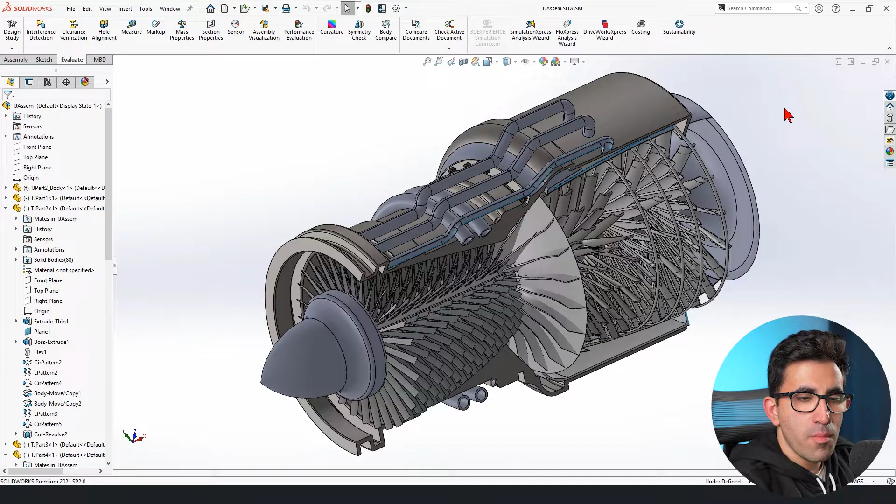Okay, the first tip I want to share with you is pack and go. You probably have heard of this one but never come across it. If you haven't, it's a feature within SolidWorks Assembly that allows you to export your model with all its features, parts, drawings, and even rendered simulation. So the test results, you can attach all of it and export it all together.

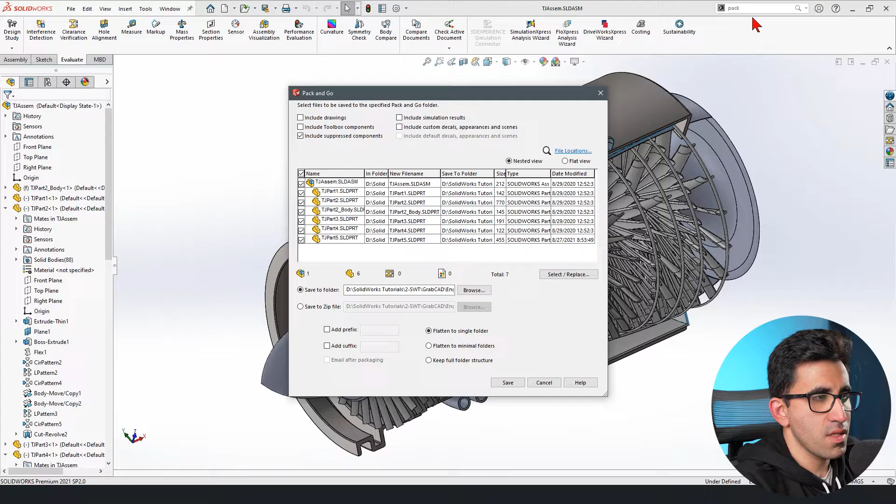Why should you do that? Because like most of my students, when they start as a beginner, they don't realize that SolidWorks Assembly is nothing but a bunch of relations between the components that you have already modeled in part mode. So SolidWorks Assembly does not contain those actual parts. When we're looking at this turbine, we don't have all these components in the assembly mode. The components are being called from different locations on your computer, and they are just mated together. So SolidWorks Assembly is keeping tab on the mates you have applied on those components, not on the components themselves.

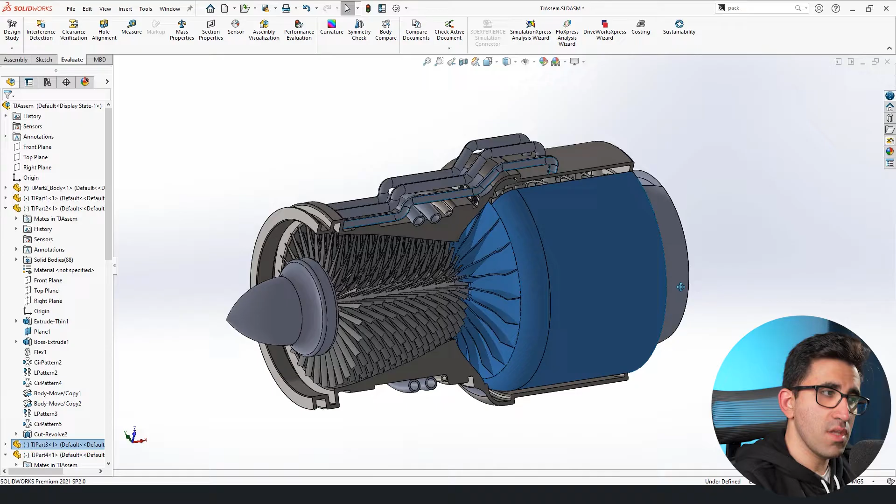So when you want to send your assembly file to someone to check or to show your work, you have to make sure that all the components used in that assembly are sent with it. And since sometimes you're taking different components from different folders, you forget that. Pack and go is the best feature for that, and I'm going to show you how it works.

You could search for it on the search bar in the commands. This is the easier way, or you could go to file and find it here, pack and go. So this is the interface.

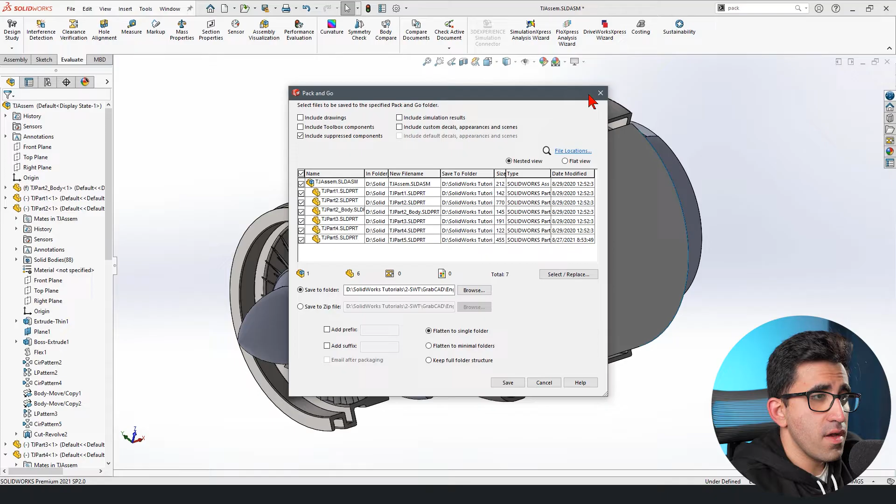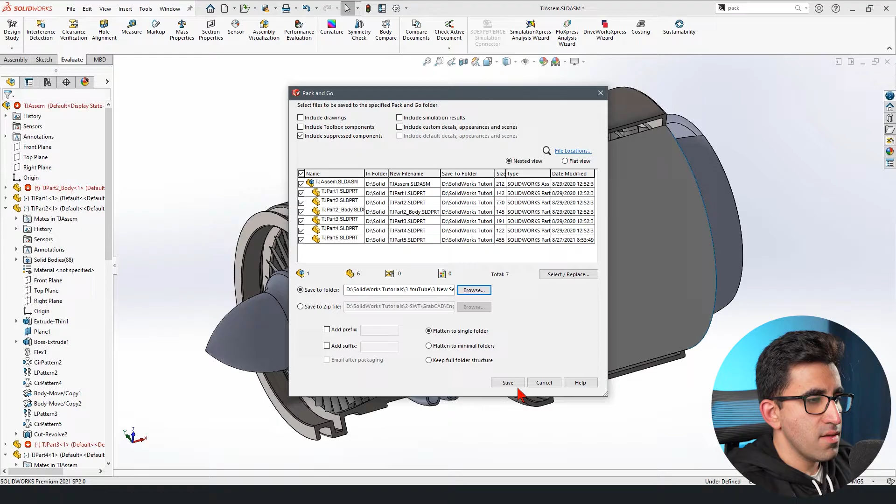Now we go to pack and go. This is the interface. We can see our components are listed here. We have 1 assembly, we have 6 components, none of which have any assigned drawings, none of which have any assigned simulation results. If they did, I could have included them here by checking these boxes. As you can see, include toolbox components if my assembly had any toolbox items in it, like bolts, nuts, and any type of fasteners. So you could just change the folder you want to save all these components and assembly files to, find that, save them all there.

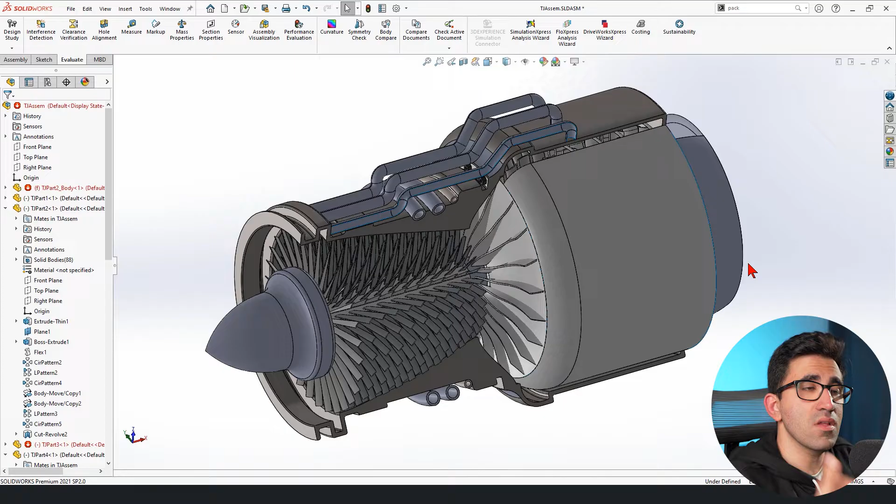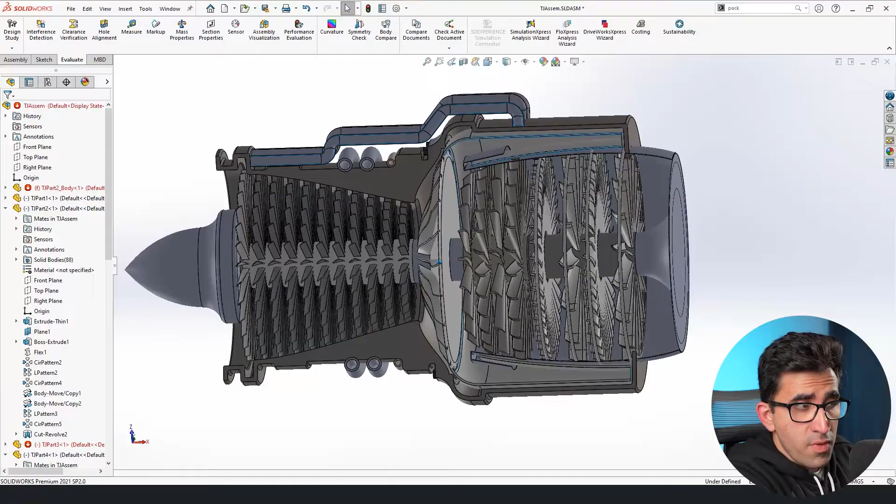Tip number 2: in case you didn't know, you could also create a new component within the assembly mode in SolidWorks. It comes in handy when you have already assembled your component, everything is in the right place, and you feel like, oh, there should be a new component there, but I haven't designed it. You could obviously measure the distances, come up with some dimensions, go to the part mode and design it, or you could just do it here.

For example, if I wanted to add something here - this is a turbine engine that I did not design. Let's just say we need a hole on this disc, and then we need to insert a pin, and that pin is not designed yet.

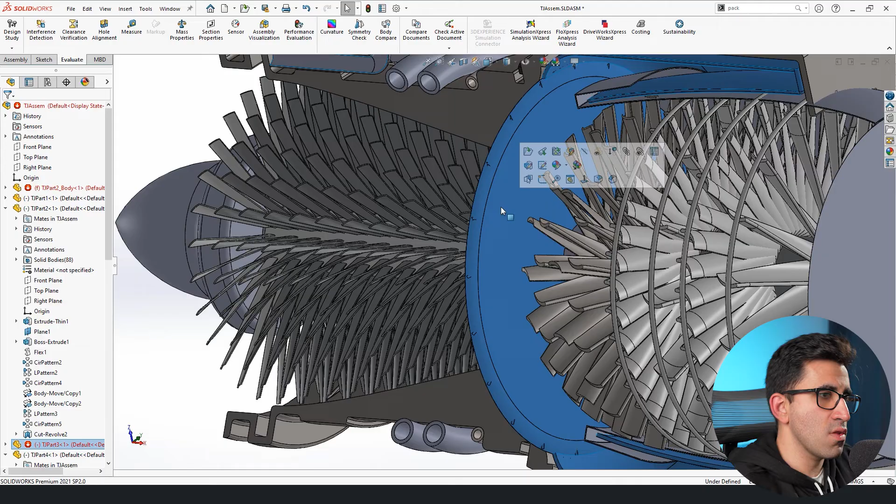So first, let me edit the component, draw something quickly on it, and then go to Features, Extrude Cut. Okay, it's done, now we have the hole. I just edited that component.

That doesn't count as my tip, I just prepared it. Now I need one pin for this hole, and all I have to do is go to the Assembly tab, underneath Insert Component, and pick New Part.

When I pick that, it depends on the standard, it gives me some messages, but I don't need to pay attention to that. Press Enter one time and let's simplify everything. This is the newly created part - it gets added to your design tree, usually named 'Part', and it's fixed.

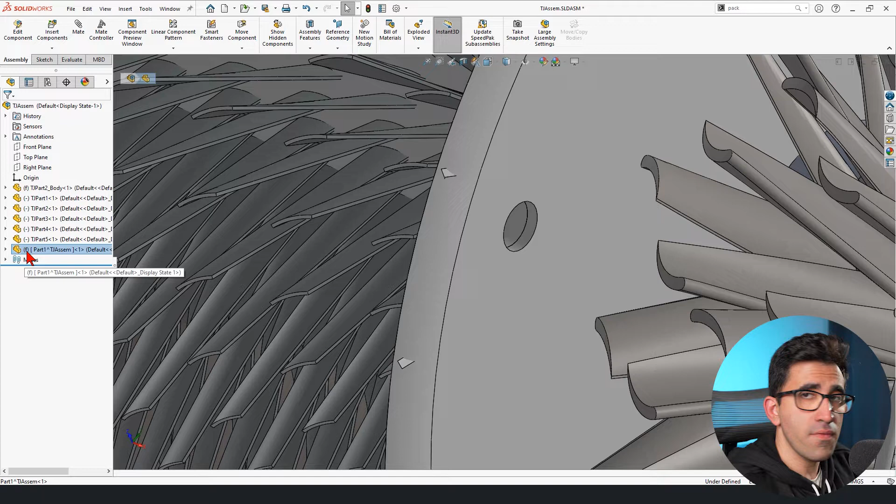As you can see, it has the symbol F next to it, which means it's not floating, it's fixed. Right click on that and float it first. We don't want anything fixed because that component is empty.

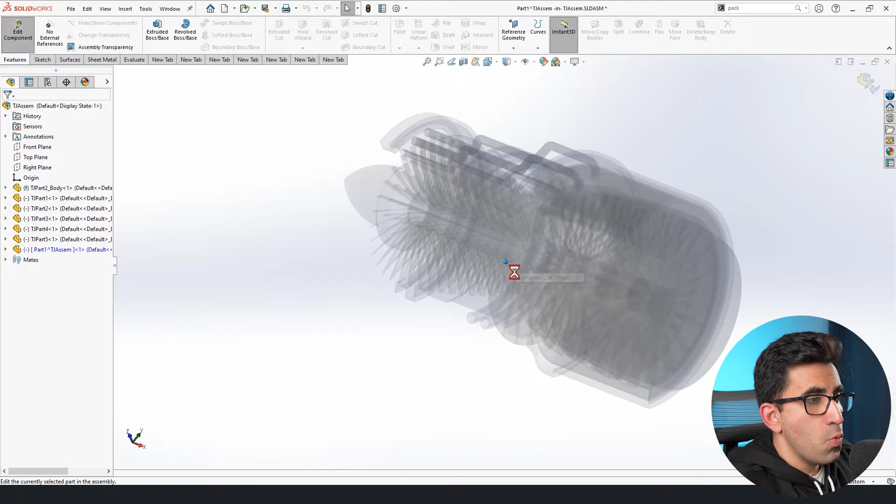How do we edit one component? One left click on it in the design tree and pick Edit Part. Make sure the part you're editing is not mated or fixed in space, that's fine. Now we need to pick a plane to start drawing our component on.

The plane I want to pick is this disk itself, like this, and then I activate the sketch. In this case, I select this edge and convert it into an entity.

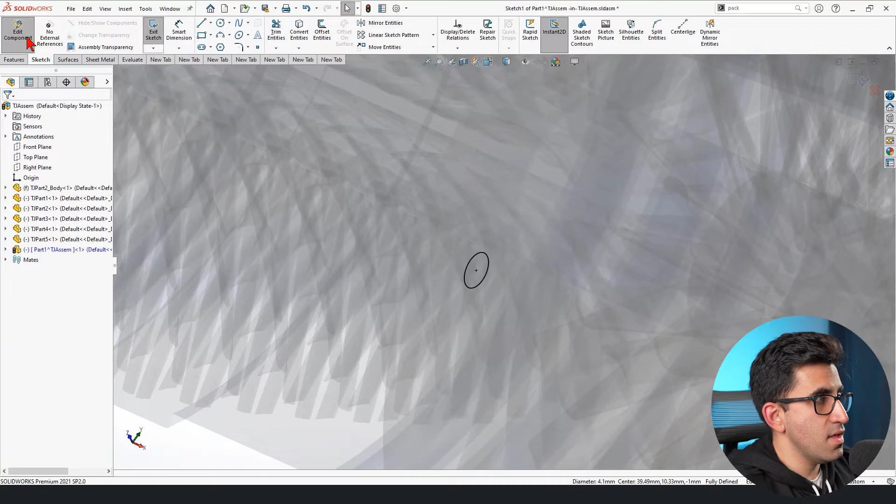Then I go to the Features tab and extrude it. This way is fine, click OK, and now we have a new component. Let's just rebuild it - done.

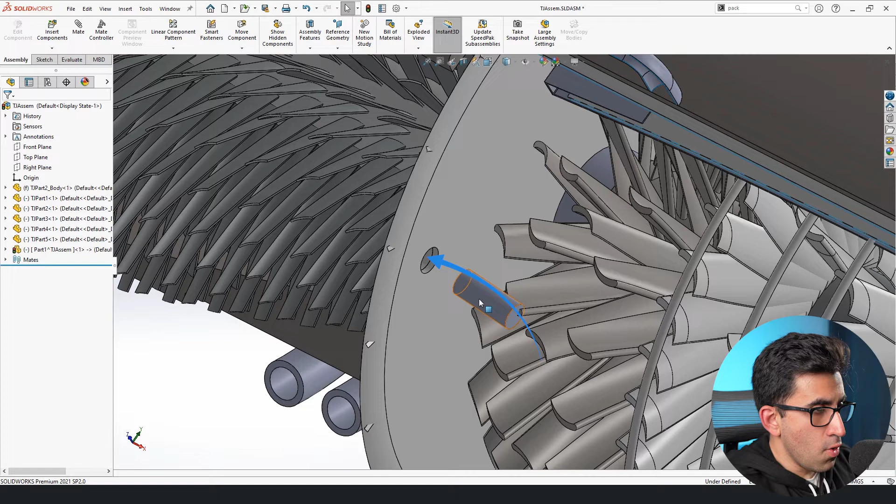So this is our new component. As you can see, when I select part, it gets highlighted, and yes, it's floating. So let's mate it to that hole. I showed you how to quickly mate your component in the previous video, or the one before it.

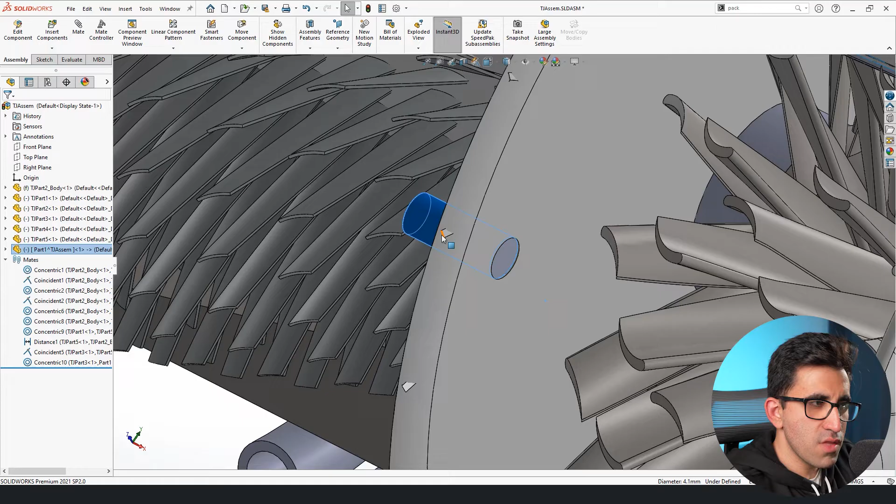Yes, this is the pin, and I select these two and mate them together. Something weird is happening - all right, I hope it doesn't happen in your model. What's happening here is a very rare, unusual case for me, and I'm not going to spend time evaluating that.

This is not going to happen for you because it doesn't make any sense, I don't know why it's happening. It's a pin and it's a flat surface, they should be coincident. Done.

The point was how to create a new component. I'll walk you through those steps one more time. First thing, you need to come here, click on New Part, click yes.

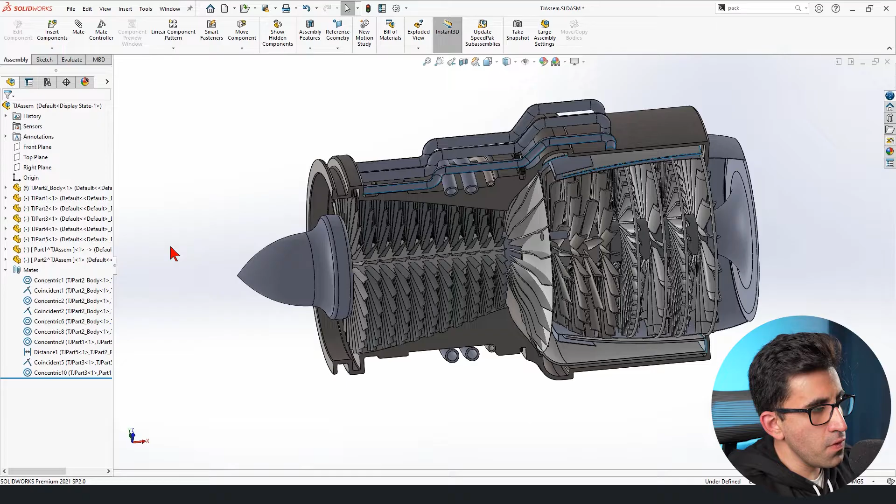You do that and the component is added to your design tree as fixed. So right click on that, float it - it's not mandatory, it's my recommendation only. Once you've floated that, one left click on that component, click Edit Part. When you do that, your component becomes ready to edit, but since you don't have any component, it's empty.

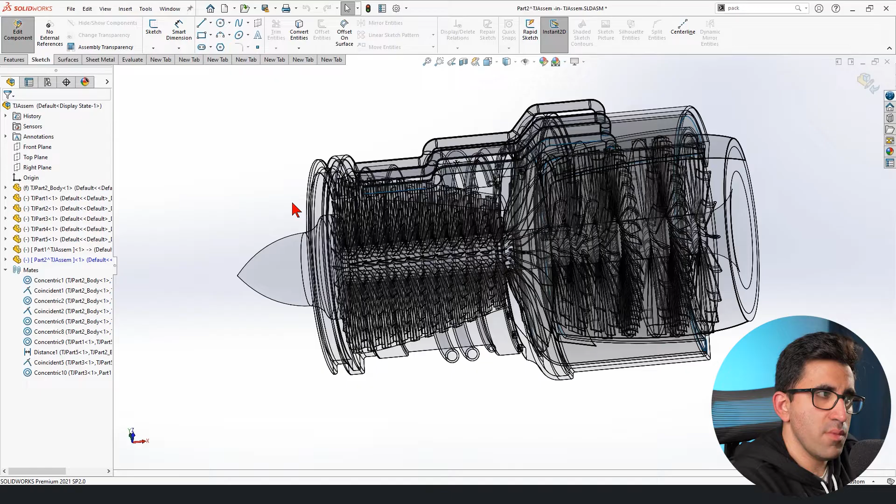You need to pick a flat surface on your assembly or a plane, to start from scratch like you're in part mode, and use all the drawing tools you have, because your menu within the assembly mode turns into the part mode's menu. You have all the typical sketching tools - you draw your sketch and extrude it, revolve it, and so on and so forth.

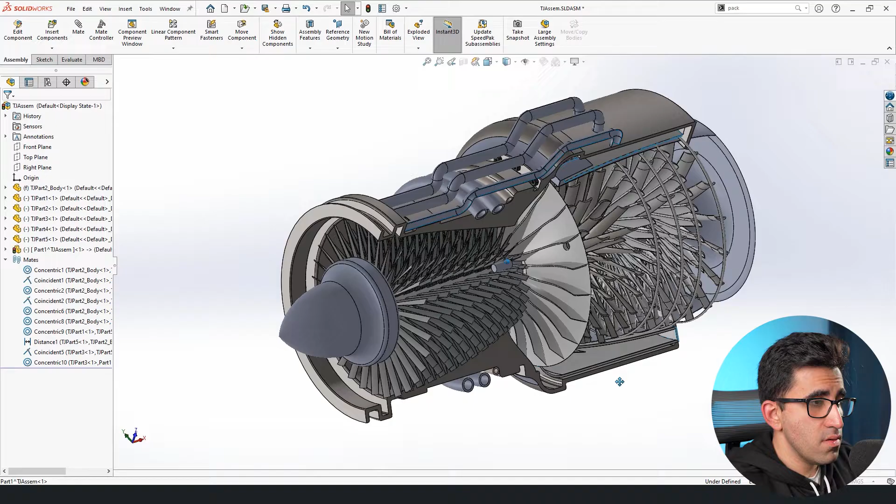So this is how you add a new component. But we are not finished - let me delete the last empty part I added, don't save it. We have already added one new component and I'm just going to leave it here. That's fine, and now I click Save.

The first time I click Save, it got saved, but it's saved as a component internal in the assembly mode. This component does not have a unique individual file somewhere in your Windows Explorer. If you want to save it, SolidWorks asks you if you want to save this newly created part internally or externally.

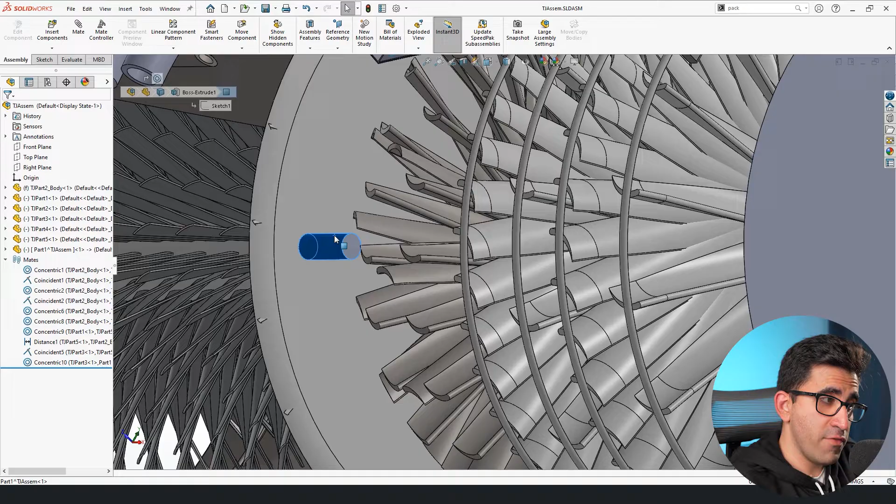If you select externally, you can save it in a different window. Otherwise, if you have deactivated that option, you can open that component in part mode, then save, save as, and just save it as a newly created component. That was tip number 2.

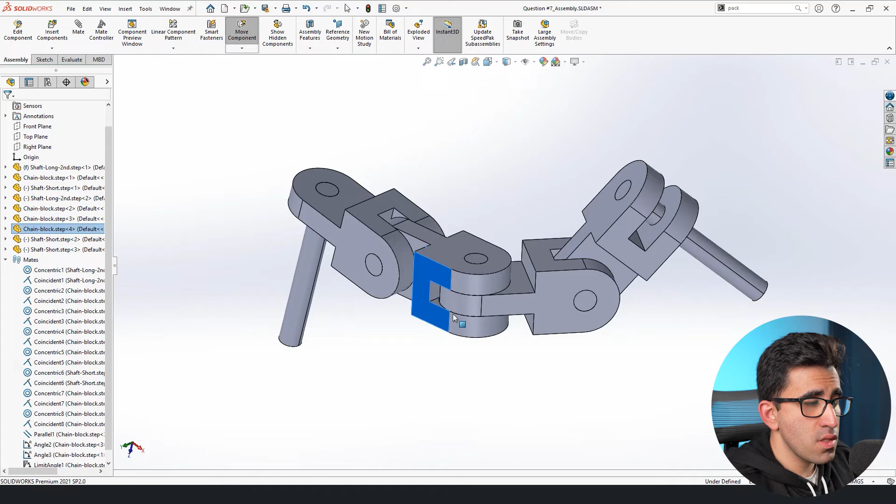So tip number 3, rigid versus flexible subassembly. What is that? I'm looking at a different assembly right now, and we have one advanced mate that allows these two components to vary between 0 and 30 degrees. Okay, so I'm gonna save this.

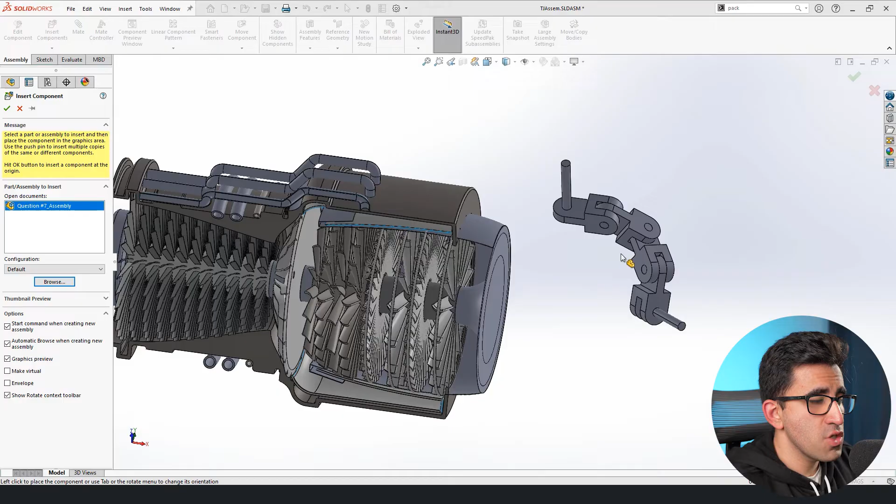Then I go back to my turbine assembly, which has nothing to do with this assembly, but I am going to insert the other assembly into this one. So how do we do that? Insert Components, browse for assembly - actually it's here, and I just put it there. Let's assume I want this to be concentric, and to make him go fixed, this surface has to sit on this surface. Done. This is not our point.

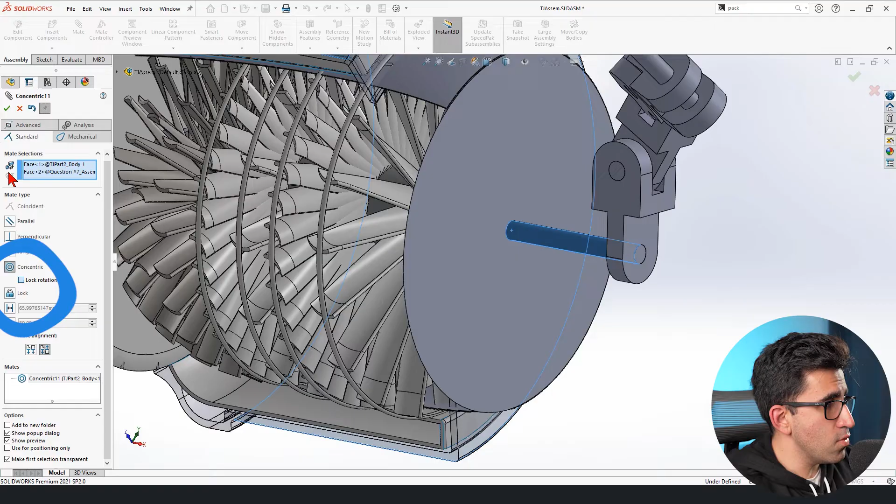One thing I forgot is this concentric. Let's just quickly edit it. I want to lock the rotation. Lock rotation, and done.

So we know that this sub-assembly that I've just inserted into the other assembly, as you can see, is an assembly of its own, is dynamic. I could move its component, right? As you can see, it should be moving. But when I insert it into the other assembly, it does not move.

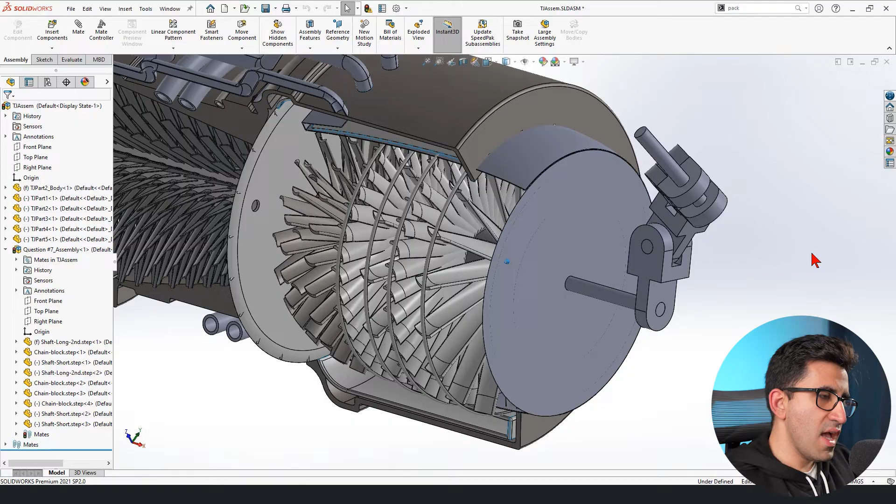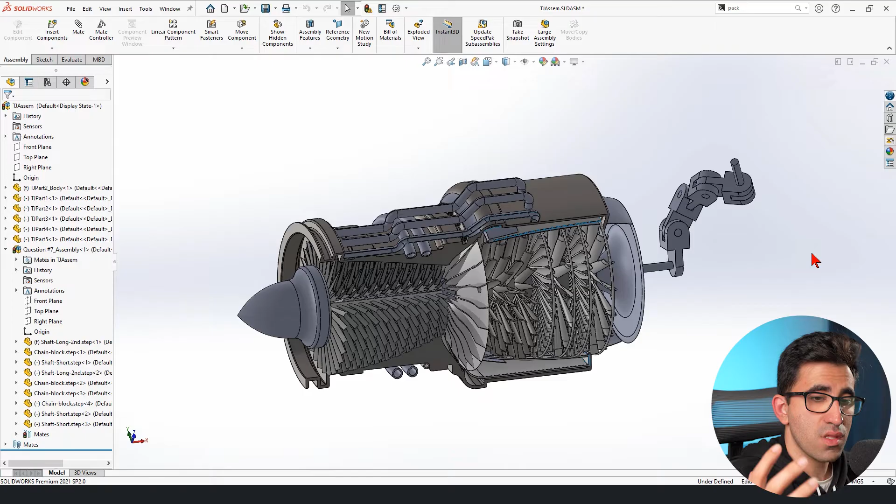So why is that, and how can you change it? First of all, why is that? The reason you cannot move it is because by default, SolidWorks inserts all your sub-assemblies, that is other assemblies, into your main assembly as rigid. It kind of locks all the mates, all the dynamic mates, like distance limit, angle limit, path, and some others, into a paused situation, so your SolidWorks can run much smoother. Because if everything is in dynamic mode, the calculations could go crazy, and if you don't have a strong enough PC, it could slow down your process a lot.

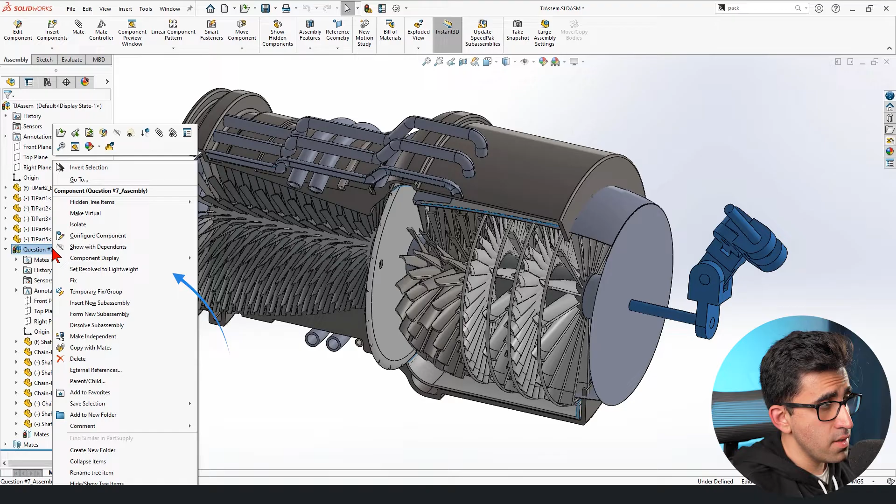So what if you want your sub-assemblies to be dynamic? How do you deal with that? In that case, you find that sub-assembly in question in the design tree, right click on it, and go to component properties. When you do, you'll see an option called solve as, and it's currently set to rigid by default. If you set it to flexible, then your sub-assembly will become flexible. That means all its dynamic mates come back into motion, and you could move them within the main assembly.

So if you're working with a big assembly with a lot of sub-assemblies and your SolidWorks is running slow, it's a good idea to set all those sub-assemblies, or at least the ones you don't necessarily need to be flexible, to rigid. This way SolidWorks treats them as one big component, which is much easier to calculate and deal with.